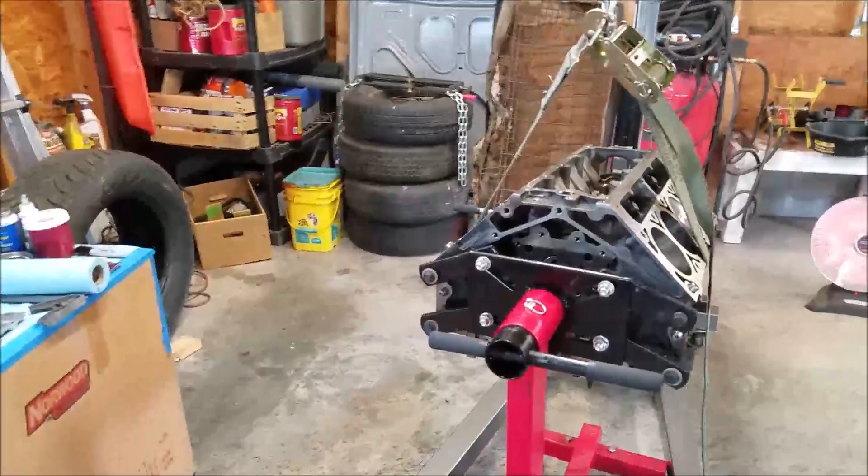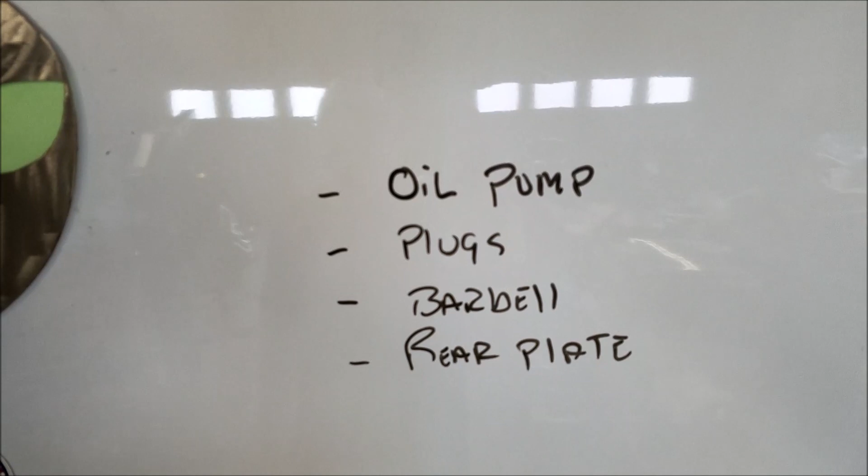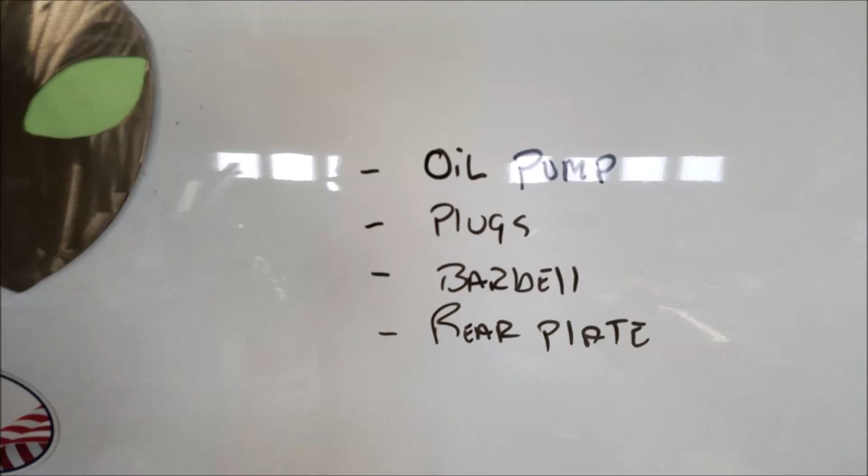What we're gonna do today, we're gonna install the oil pump, the plugs. They're just plugs. Anyways, barbell, little oil pump barbell, and also the rear plate. This is what we're gonna do because the other parts are coming in, so we're gonna do what we can when we can. Here's everything I think we need from this point over. When we get the other parts in, we'll go over this way.

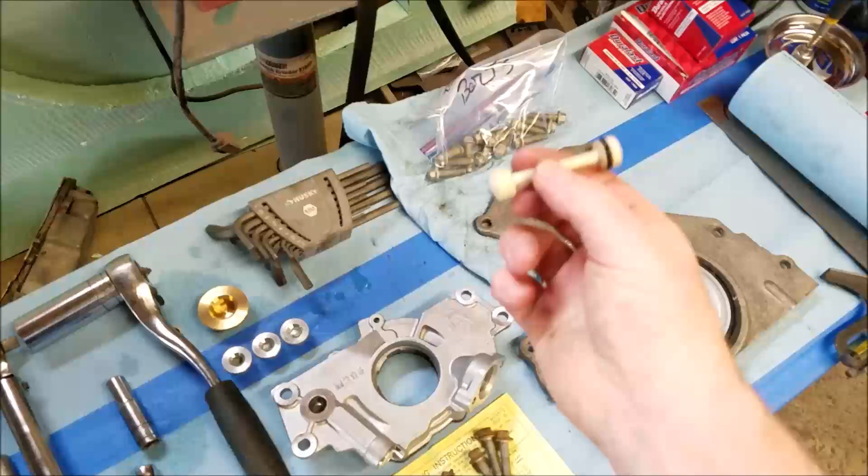Anyways, so this is the oil pump. We got it from Summit Racing, and this is the old plate. I put a new gasket in, and this comes out as just a placeholder or whatever. And then we have the barbell. Oh, it's like going to the gym with this barbell. It's so heavy. But anyways, we're going to install that.

And there's the plugs. I'm not going to be able to do them all because the machine shop put in the old ones. And since I bought these, I'm going to put them in, or as many as I can. Anyways, so let's get started.

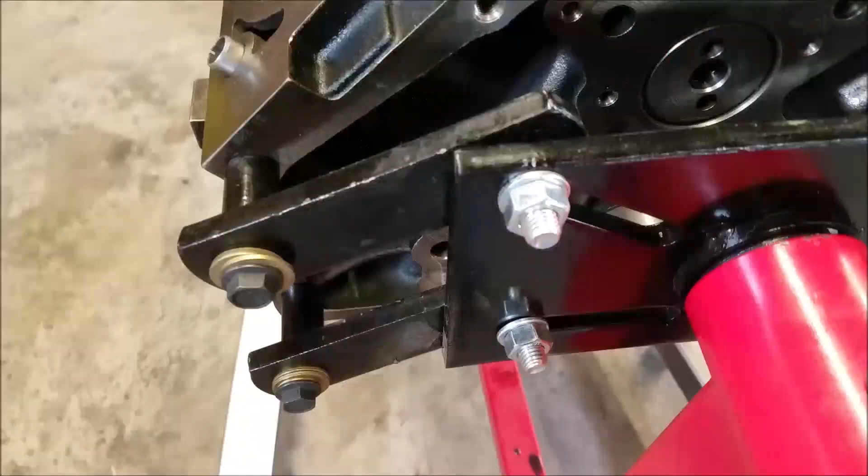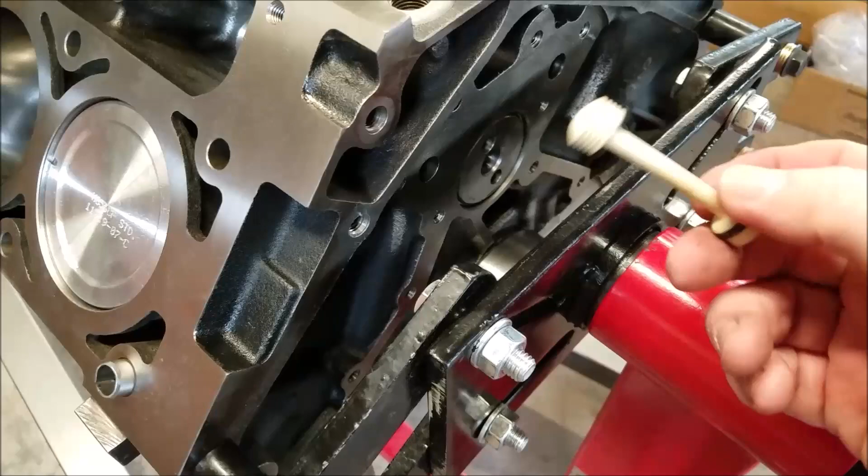All right, before we put the rear plate on, we have to put in the barbell. The barbell actually regulates the oil flow to the oil filter, I'm pretty sure. Yeah, I'm pretty sure about that. Anyways, it goes on the rear driver's side of the engine. Let's see if I can get it. Yeah, it's going to be right there.

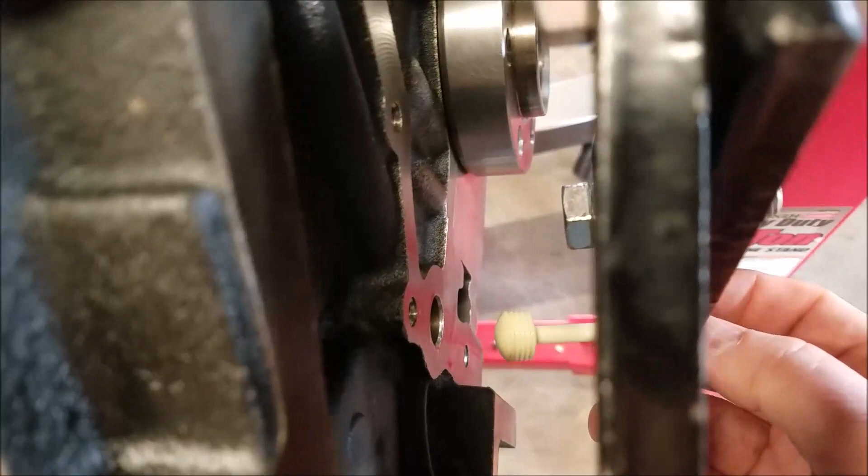So I had to drop down the engine a little bit so I can get in there. Just slide it in, and there we go. There it is. Now the plate's going to go over that, and that will keep it in there. There it is in focus. All right.

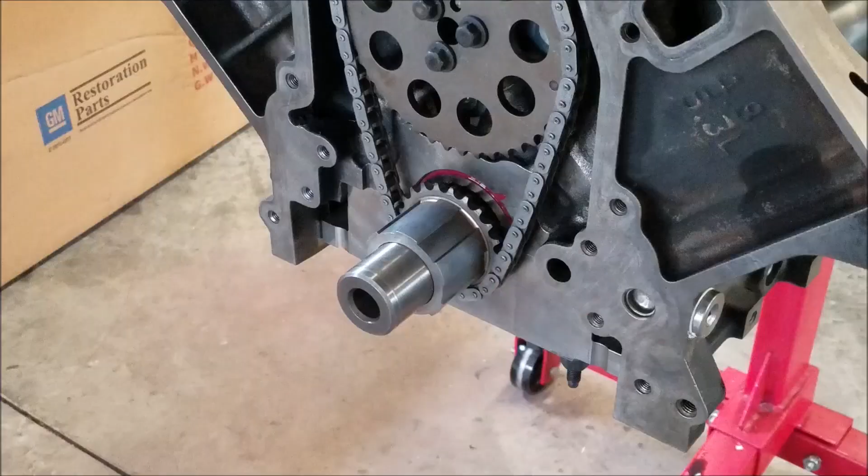All right, we're back at the oil pump. Let me review my notes real quick. So we're going to grease the bolts, torque them to 18 foot-pounds. There's 4 bolts. Here, these two. I think these two. I don't think anything goes in there. No, I don't think so.

Let's see. We're going to pour a little oil in the pump. Move the gears around. We're going to install the bolts, finger tight. We're going to turn the crank, and then we're going to torque down to 18 foot-pounds. All right. Notes reviewed. First off, pour a little oil in pump.

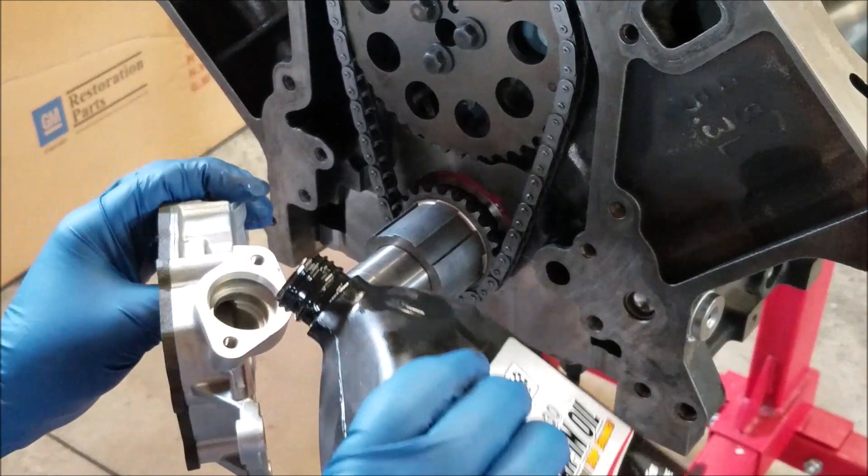This is break-in oil. Anytime I'm using oil on this thing right now, it's break-in oil. I'm not going to use anything but break-in oil. Yeah, it's 10W30 break-in oil. Just going to spin this around, get all lubed up in there, good enough. Probably dribble out on the floor a little bit, that's okay.

Line it up with the tabs without breaking it, and line it up with the holes. Engine's right side up, so this goes right side up. Okay? Go ahead and finger tight these bad boys. All right, these are just finger tight right now, and I gotta put the bolt back on. Here's the old harmonic balancer bolt. Put it back on so I can turn the crank.

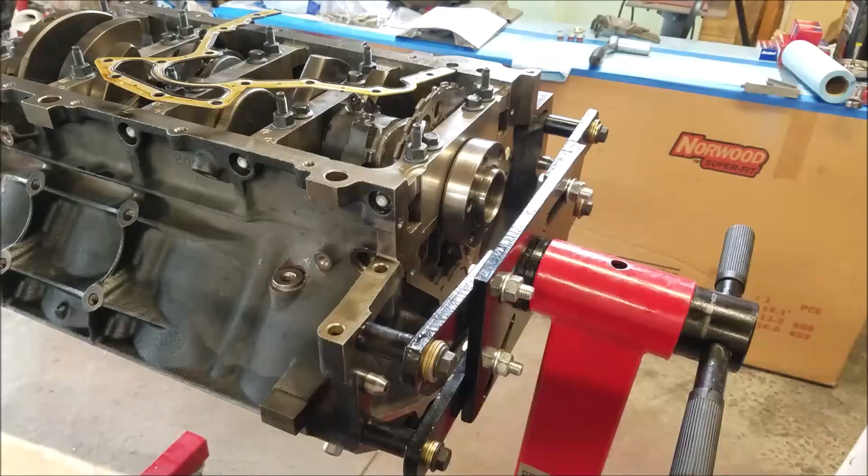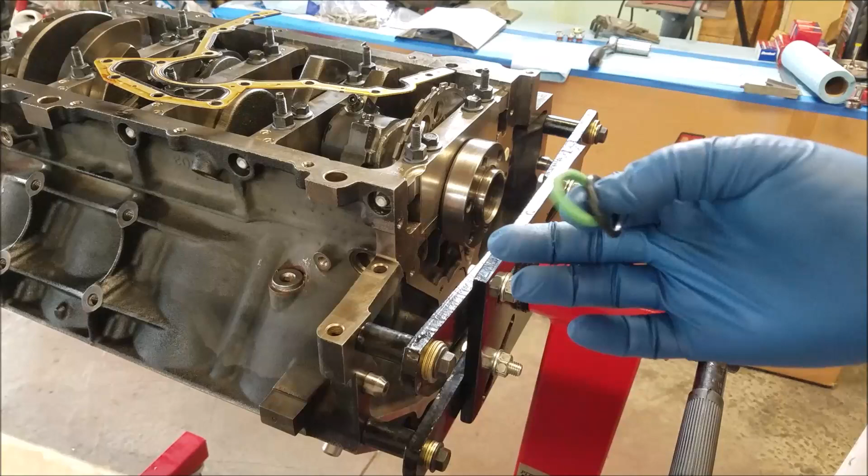All right, that's it. Oil pump installed. All right, we're at the back of the engine and we flipped it around. Hey, just real quick on the oil pump, it came with two gaskets and it's for the pickup tube for the oil pump. And I haven't got that in yet, so we're gonna wait and then we'll install that. I'll just let you know it came with those.

And this is the back plate. This is the inside of the back plate. I cleaned off all the surfaces real quick. I wiped it down with mineral spirits, and I wiped down the mating surface on the engine with mineral spirits as well. And I've already installed the gasket right there, or O-ring. Actually, it's O-ring gasket, whatever.

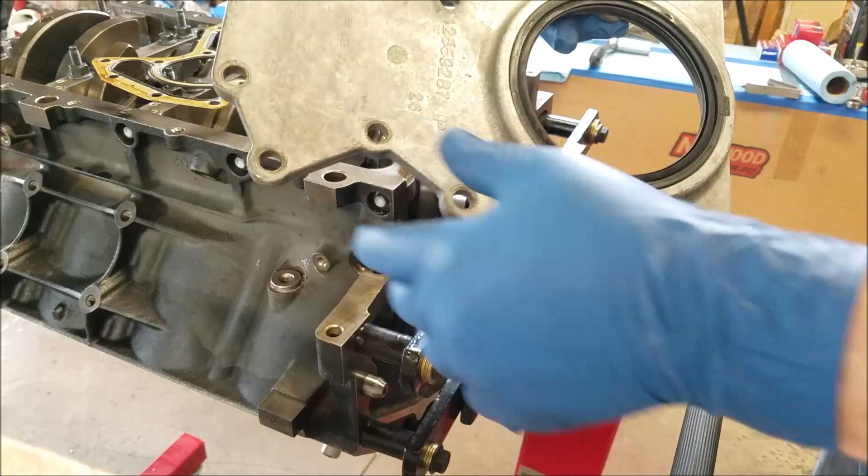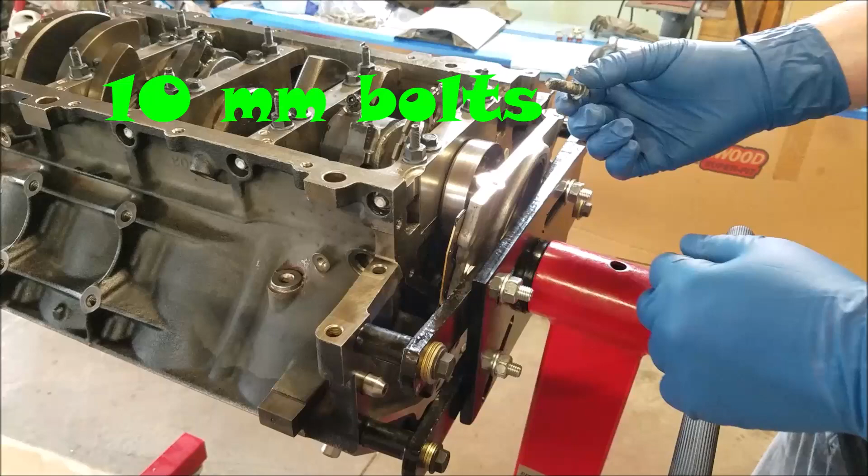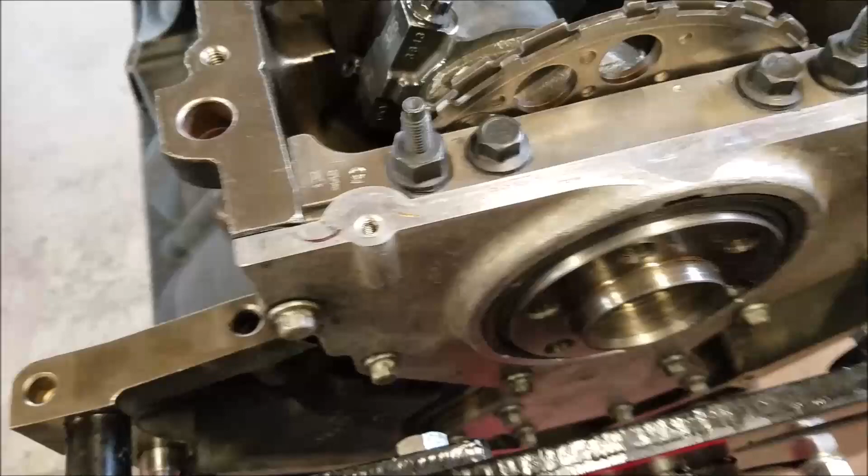All right, I got everything pretty much finger tight. I wanted to put equal pressure around this gasket so it slides on and fits correctly. Everything's not torqued down, and it's torqued to 18 foot-pounds, all these bolts. What we need to do is to make sure this surface right here is flush. So that's why this plate is loose, so we can smack it around and make sure it gets flush. To do that, we're going to use a straight edge. The plate has to go down just a little bit.

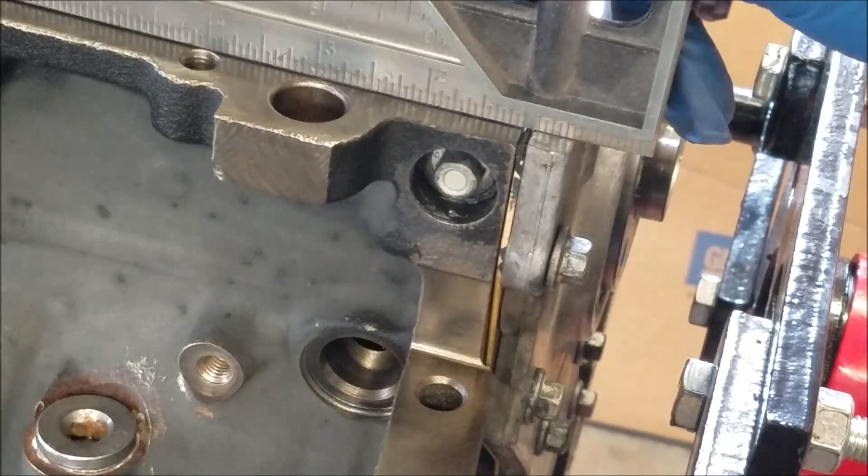That looks good. I'm looking a little bit lower than you are, and that looks pretty good. Yeah, I say that now, and later on we start it up and it starts seeping oil, and it's just going to suck. But it won't, because we did a good job.

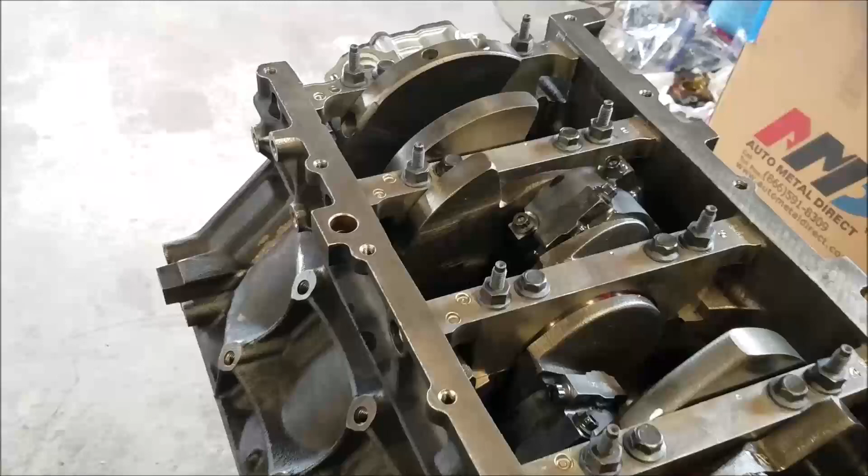Anyways, later on when we put the oil pan on, we're going to put some RTV right here, gasket RTV, and on all four corners. And after we put the front plate on, of course, but that'll take care of these little spots that tend to leak oil, and everybody's been putting RTV on there, but we'll have to wait for that. Let me go ahead and torque all these down, and we're done. All right, not going to lie to you, these are going to be hard to torque down. Remember, 18 foot-pounds.

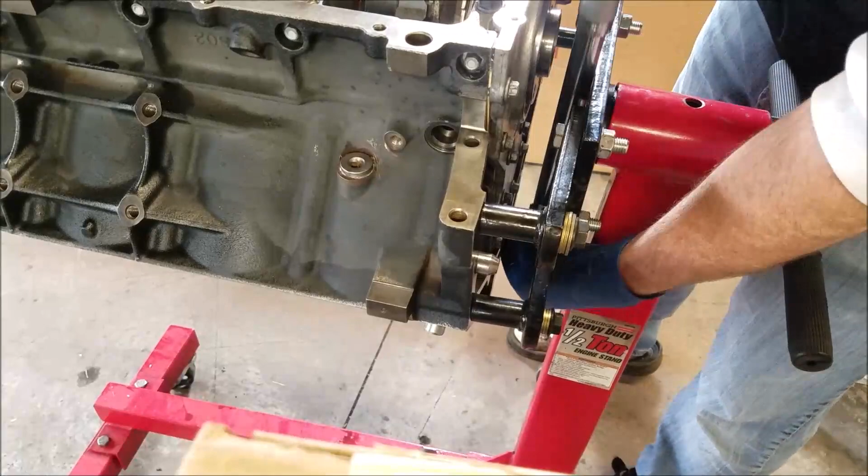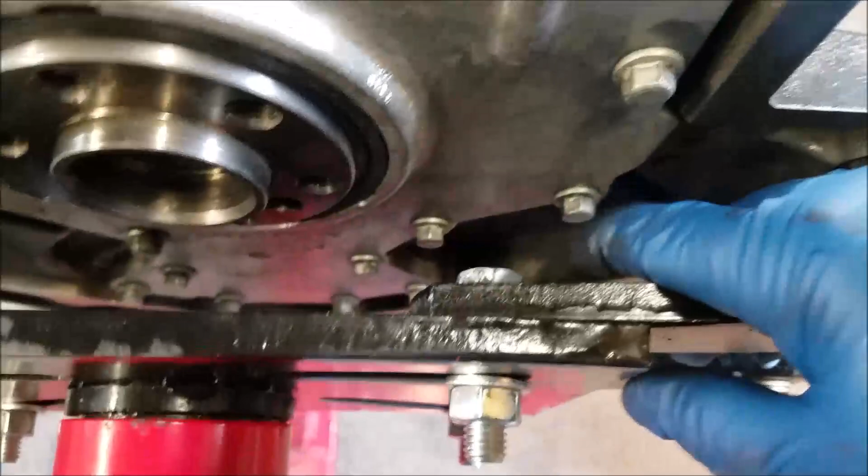All right, that's it. All of them torqued down. This was the hardest one to get to. I got that off camera. I had to speak French. Anyways, the goal was to get this flat as well, and everything torqued down equally. I guess the trick is just to get this on as best as possible, and then leave them loose. Use your rubber mallet to pound it up or down to get it level, and use a straight edge.

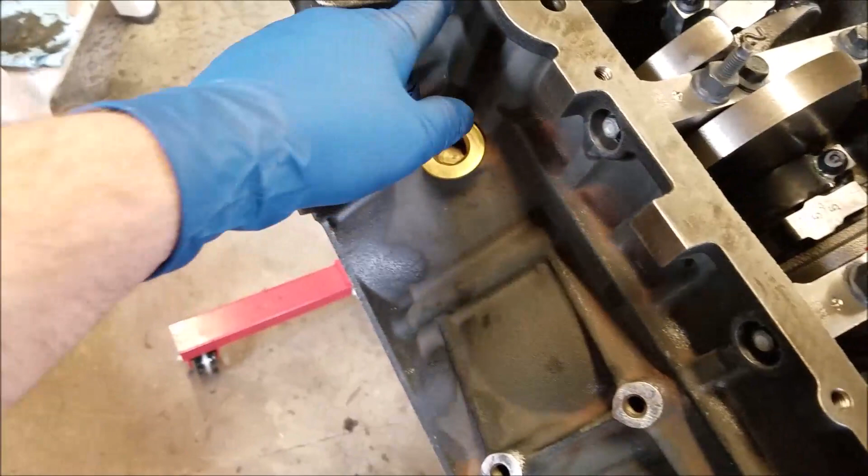It worked out. I did say I was going to remove the plugs, but I decided not to. I know these are the old plugs, and my machinist just pulled them out and put them back in, or didn't pull them out at all. I think that's probably what happened. But I am not going to remove them. But I do have a new set that I'm not going to use. Oh well.

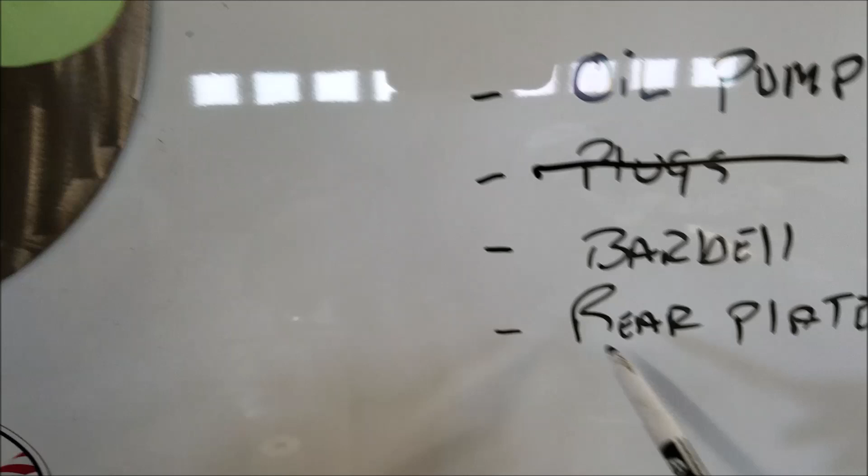All right, anyways, recap. We installed the oil pump. We didn't do the plugs. Did the barbell and the back plate. So check, check, and check. Well, that's it for now. And as soon as we get the other parts in, we're going to go ahead and put in the new oil pan. Do an unboxing, the whole 9 yards.